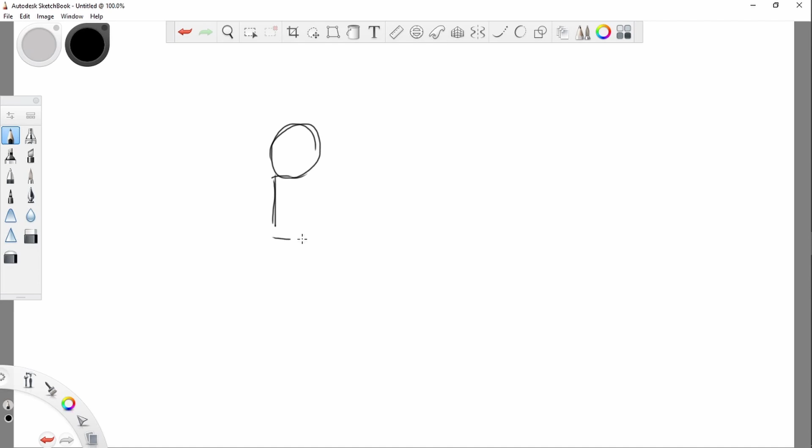He is going to have a square body and arms. I'll put one of his arms up, so he's waving. Let's give him some legs and some feet. We'll put one of his feet out to the side too, so he's in a nice pose instead of just standing straight up.

And we'll put some holes in his face. That way, he's got some eyes.

All right. So, if we're going to make this in Tinkercad, how are we going to do it? You can already see that I've made him out of cylinders and boxes, but if we want him to be able to stand up, he's going to need some surface area on the bottom of his feet.

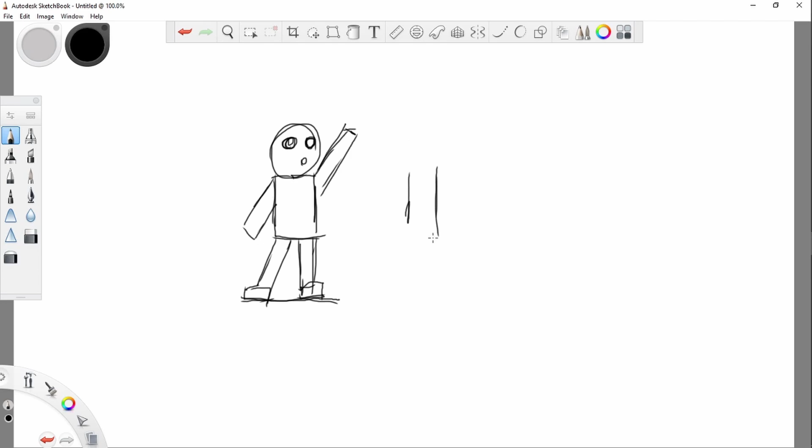So, from the side, we would see his body and his leg sticking out here, and his leg sticking down. We need to have boxes sticking out in front. See if that makes some sense here. This way, his feet give him enough area to make him stand up.

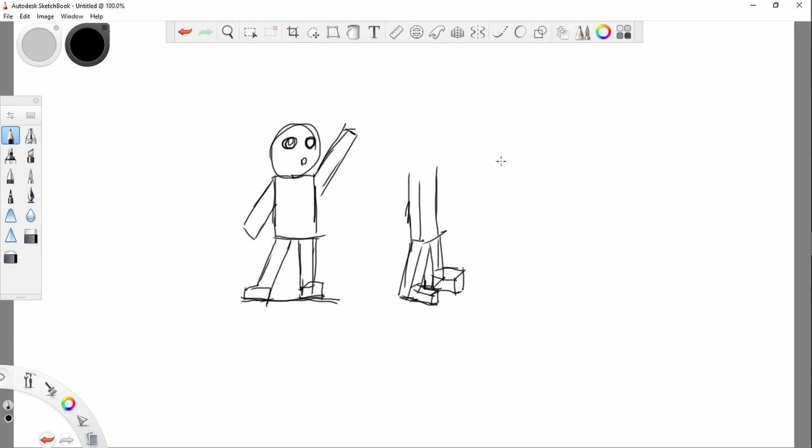We're going to want to design this so that it's easy to print, rather than having to support up his whole arm sticking up in the air like that. We're going to print him lying down on his back.

We are going to design our little stand-up stick figure guy, and we are going to design him lying down flat so that it's going to be much easier to make.

You'll see that when you move things around, they move on the floor on the work plane, and in order to make them up here, like where his face is, we would have to use our little up arrow here and move them up and down. That is going to be very difficult.

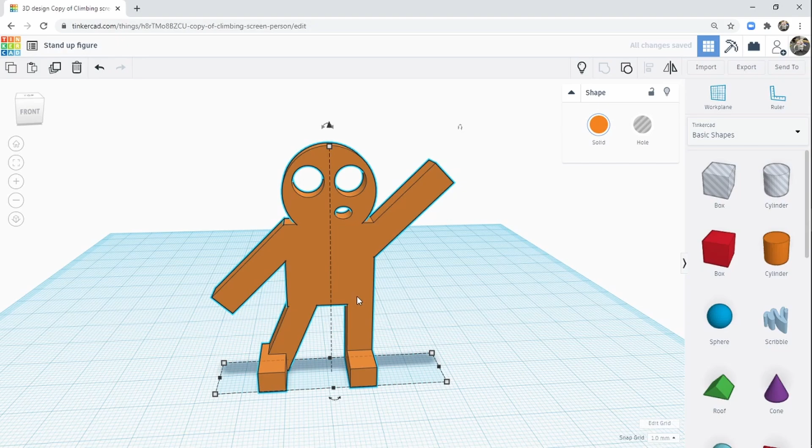So let's move our example off to the side. Let's look down at the work plane, and let's design our little guy.

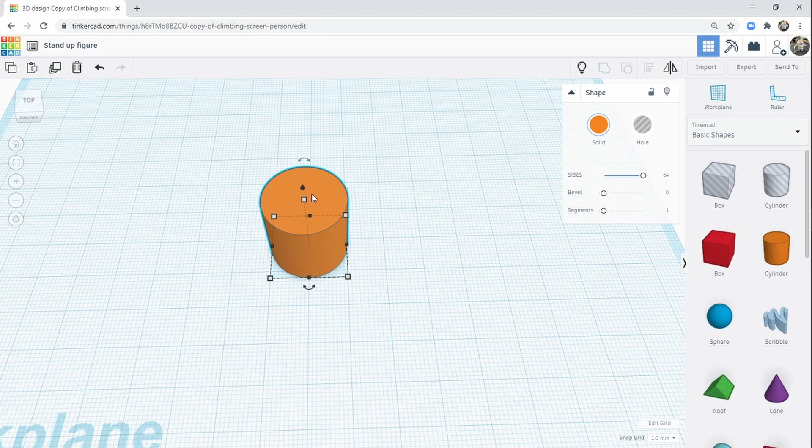So I am going to grab a cylinder, and just because I like it to be smoother, I'm going to turn up the number of sides all the way up. And we want this guy to be a little bit thin, so I'm going to make this 5 millimeters because it's a good size for a flat shape that's still sturdy enough that it doesn't bend.

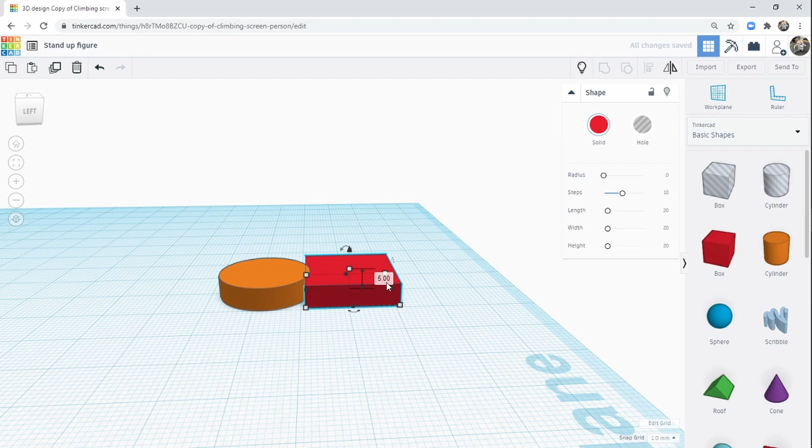All right, now I can look at this from the top, and we'll need a box for his body. We want it to overlap with his head a little bit, but we also want it to be the same thickness. So we're going to make it 5 exactly, so that he's going to have a flat surface on his front. And I'll move it over.

I can move it 1 millimeter at a time with my arrow keys, just to line it up where I want it. Now he's got some shoulders, and I'm going to want his arms and legs to be exactly the same height as this box.

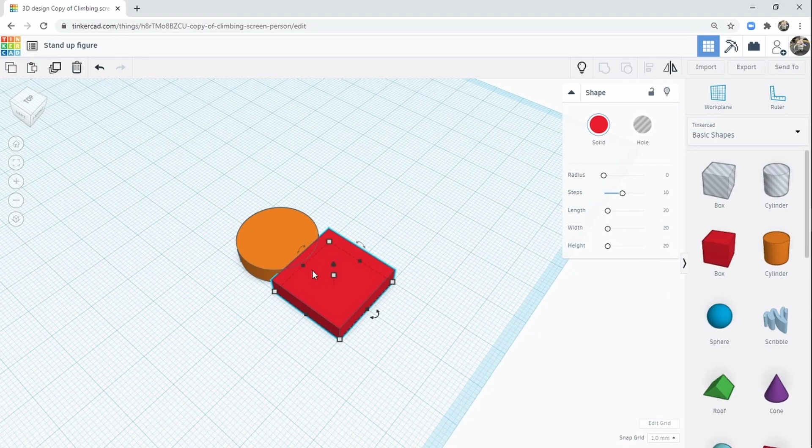So instead of doing that work again, I'm just going to make a copy of this one. I can use the copy and paste button to paste another one next to it. And then we can take this shape and decide that the arm is going to be a lot thinner. So we'll shrink that arm down. 6 seems good.

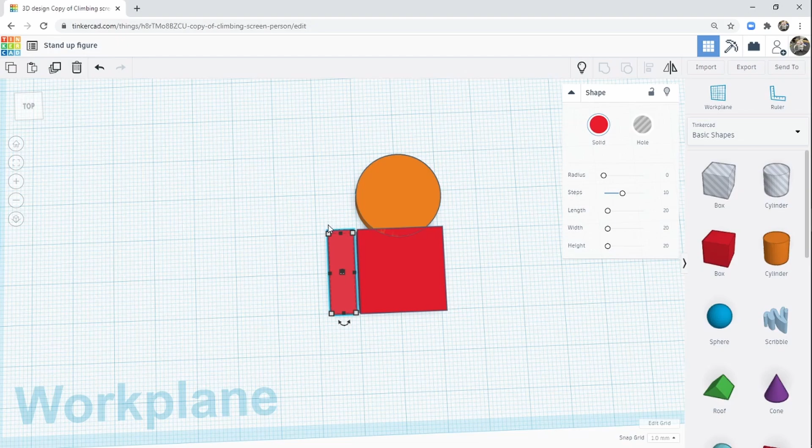There we go. Now if we keep our mouse outside the circle, we can rotate to any angle that we want. If we keep it inside the circle, we'll snap to these angles. So I can say I want his arms out exactly 45 degrees, and that seems good. Now I'm going to move it so that it lines up with his shoulder.

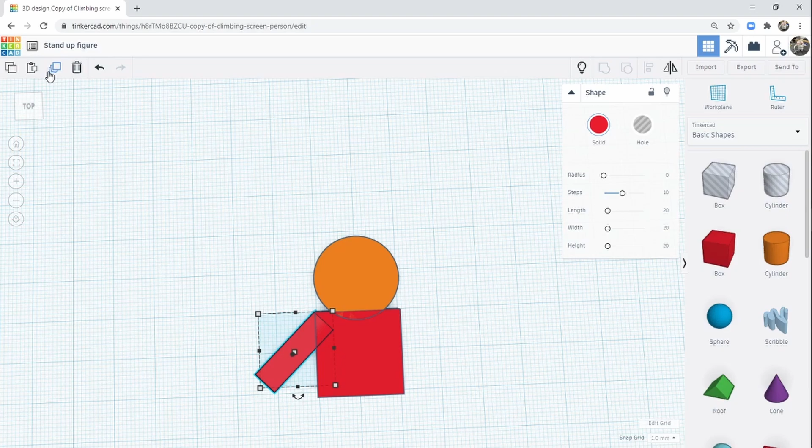And that looks nice. So now I want another arm, 45 degrees on the other side. So I am going to copy this one and paste it. With my second arm, I liked my design where he's pointing his arm up in the air. Maybe he's doing a dance move. So I'm just going to stick it on the other way.

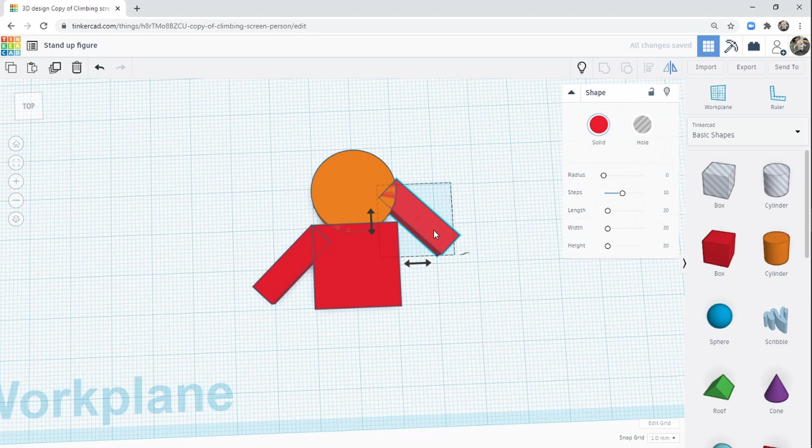Now if you wanted both of his arms down, you could rotate this, but you could also go up here to the mirror tool and just click on one of these arrows to flip it in the other direction. That way you could have an opposite shaped arm on the other side so that he's got both arms pointing down. I'm going to undo that because I like his arm pointing up.

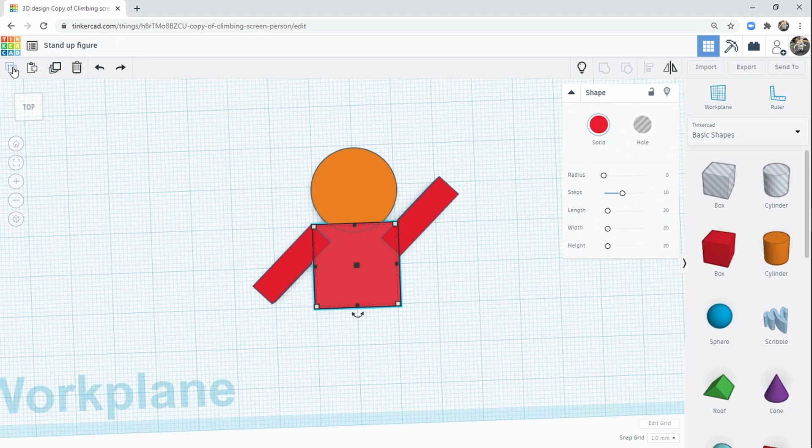Next we need some legs. So let's go ahead and make a copy of the body again. Since I already rotated these arms, I don't want to worry about rotating them back. Instead, I'll just copy and paste the body, and we'll move it down underneath and shrink it so it lines up. There we go. Now we've got one leg.

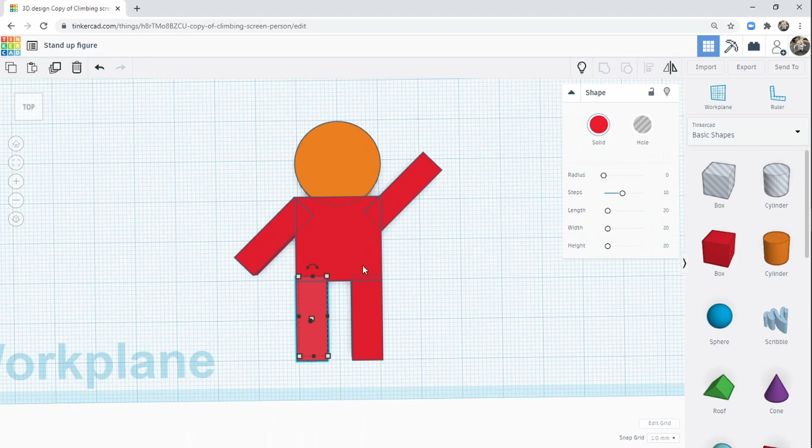I will copy it and paste it again, and we can move over and have a second leg. I like sticking one of his legs out a little bit to give him even more of a pose. So I am going to rotate, but this time instead of going exactly 45 degrees like the arm, I'll just rotate it out a little tiny bit, to wherever I like it.

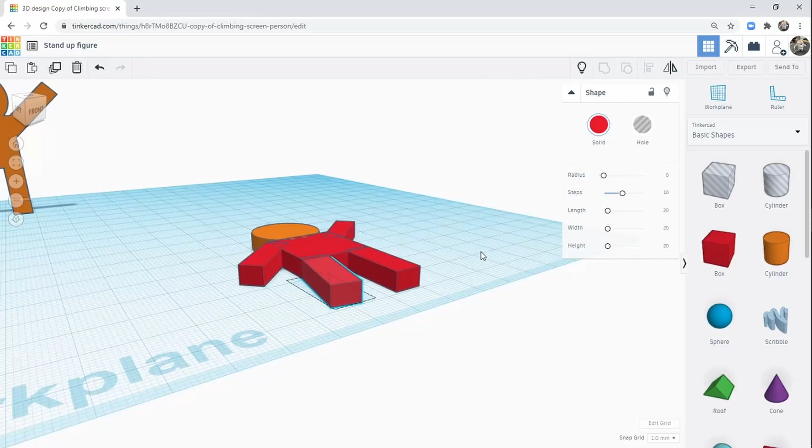And let's move it to the side so it's sticking off the side of his body there. Now we can see that if we stood him up, he has a very small area on the bottom of his feet. Because we've made him 5 millimeters, this is half a centimeter, so he would be really easy to tip over. So let's put some feet on him.

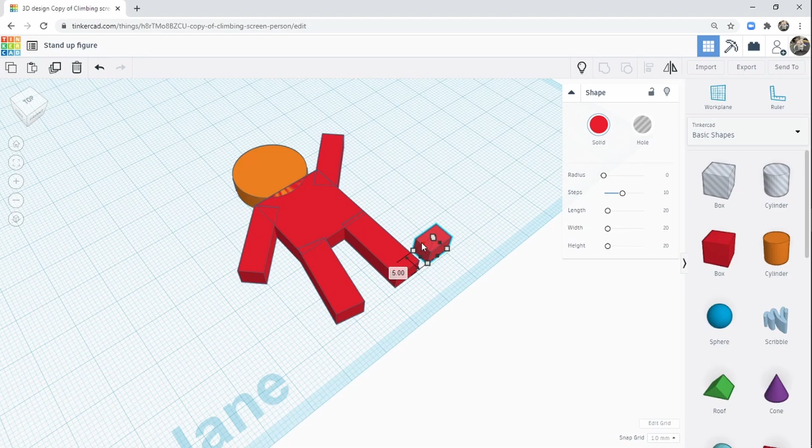And since I just copied this, I'm going to paste another copy of my leg in here. And with this box selected, I'm just going to shorten this down, so we'll have another 5 millimeter wide foot. And when I look at it from the side, I can use my top handle here to stretch this out. And there we go. We'll make it a 12 millimeter foot sticking off of this guy.

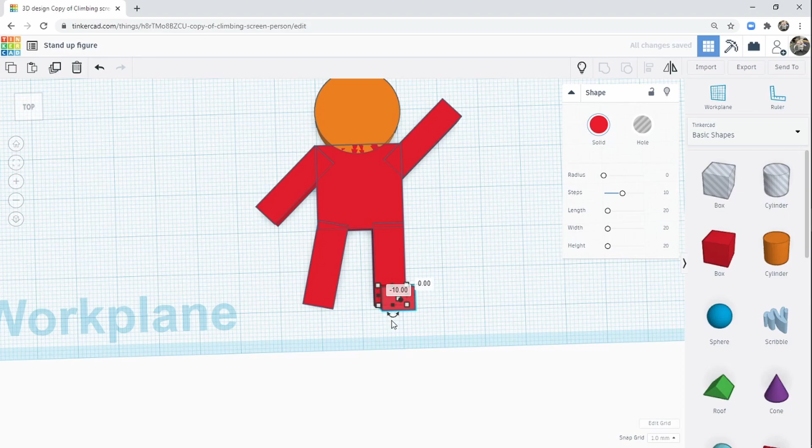Now we can just line it up with his leg here. And since we're snapping to 1 millimeter at a time, it's easy to use the arrow keys to make sure that all of the corners line up and we have a perfectly flat surface at the bottom.

Now, let's copy and paste another one of these feet, and we'll use the arrow keys to move it straight over to the side. There we go. This way, I know that the feet are lined up at exactly the same height, and that means that he will not tip over when I stand him up.

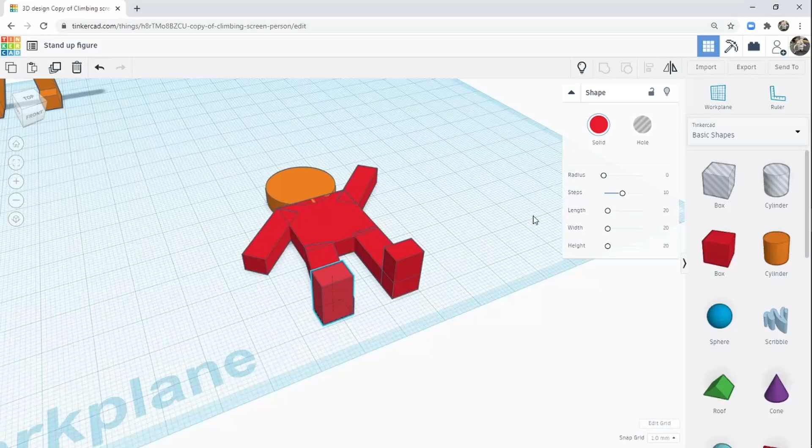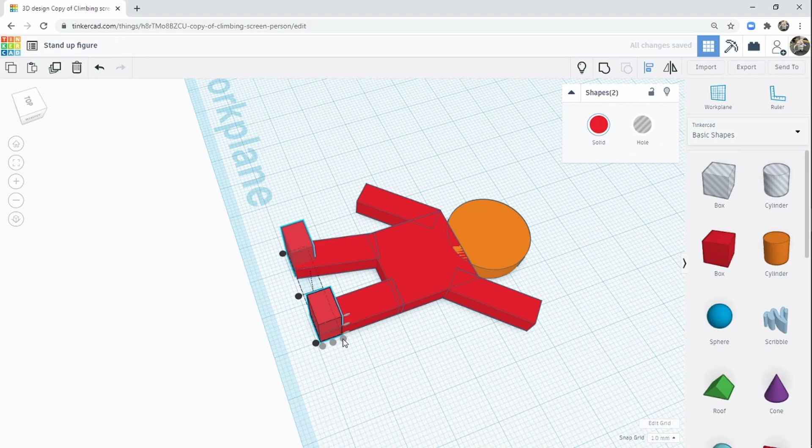Now, if you accidentally move the feet to a different place, you can hold down Shift, select the other foot, and then we can click on the Align tool. The Align tool will change our handles into these circles, and we can see that if I click on this side, I can line the 2 feet up in the middle with the bottom edge or with the top edge. So I'll just line them up with the top edge so my lower foot moves up to where my upper foot is. And now both of them are perfectly lined up, so they'll be flat on the ground again.

Let's click on this foot and just nudge it over so it matches better with the leg. Great. Now, if we want, we can add details like a face to him with some holes.

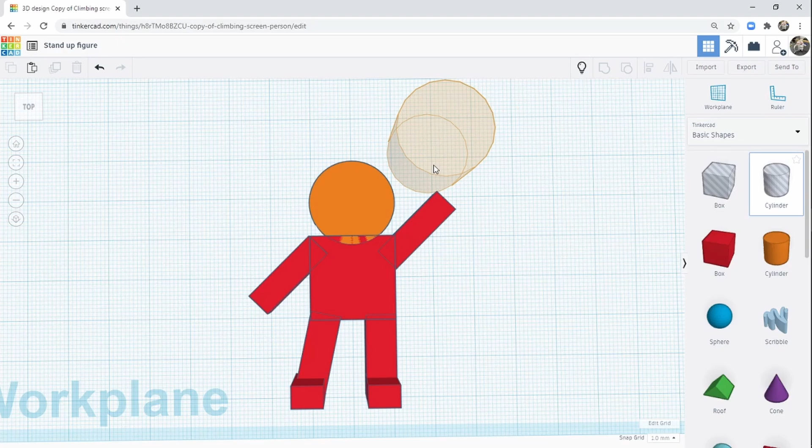So I'm going to quickly just grab a hole, and anything can be a hole. If I had a solid cylinder, I could click on hole to change it into a hole. Let's make it smooth, and let's shrink this down so that we have a shape that can be an eye.

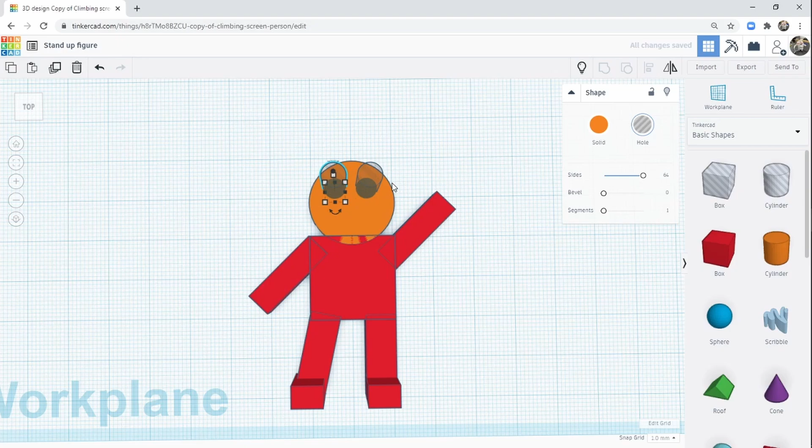Copy and paste, and we'll move our second eye over to the side, and paste one more for our third shape. Let's zoom in a little bit. Maybe make his mouth bigger than his eyes this time. Perhaps he is singing.

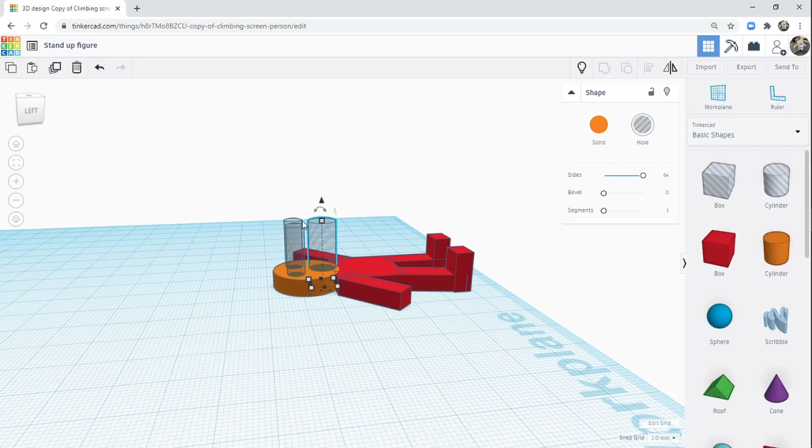So we're going to select everything and click on Group. Once we group things together, all of the solid shapes are going to be added together and all of the holes are going to be cut out.

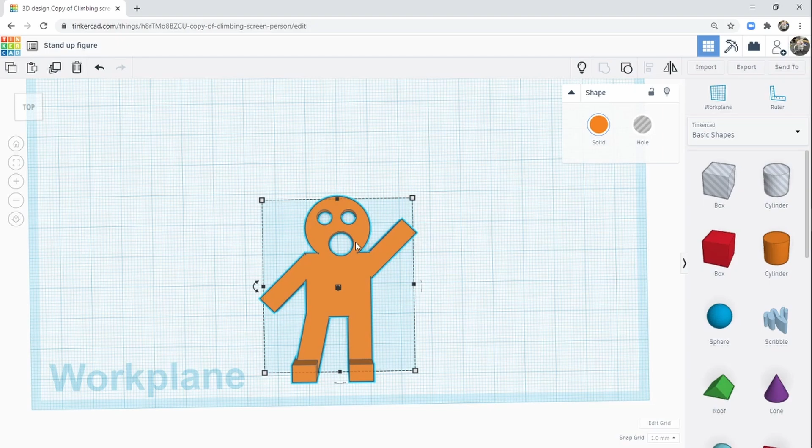Now we have our little guy with his face, and if we want, we use that rotate tool to stand him up, and D to drop him on the floor.

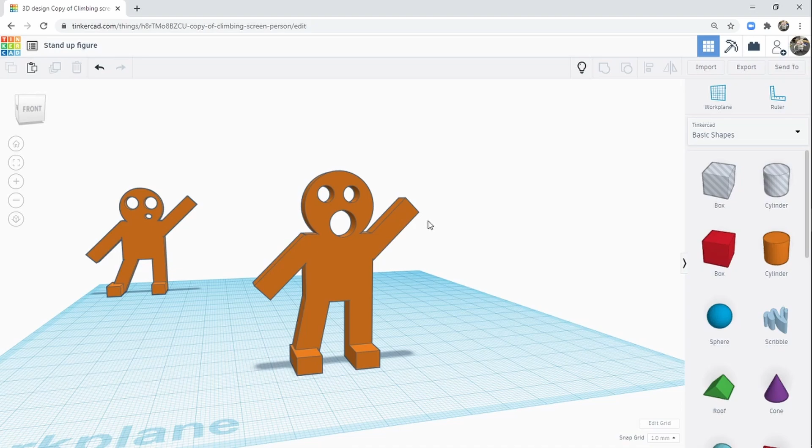Looking good. We are going to set our little stand-up figure up to print. As I mentioned in the idea video, we don't want to print him standing up, where we'll need to support his arms, and it'll be very tall, take a long time, and use some extra material.

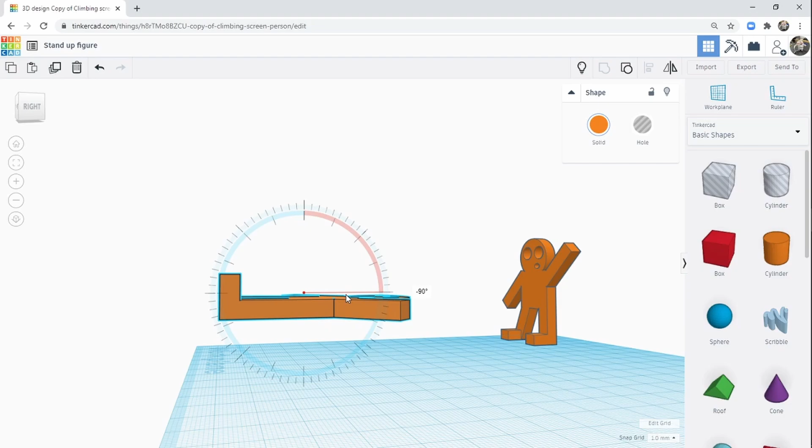So let's select him and make sure that he's lying down on the biggest flat surface he has, his back. I'm going to use the rotate tool and keep my mouse inside the circle to put it at 90 degrees. Now I can hit D to drop it on the floor.

So you can see he's not floating in the air there. And he's looking good. He's completely flat on the ground.

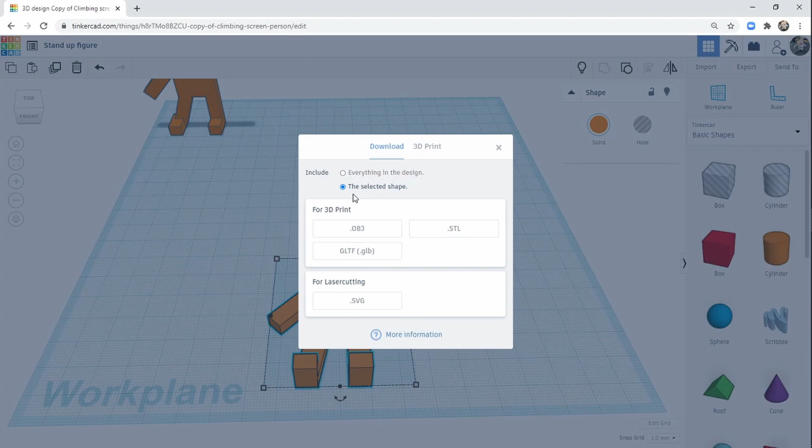So now that I have this guy selected, I am going to click on Export. We're going to export only the selected shape - we don't want our other example in there. So let's click STL, which is the most common 3D printing file. And now I've got my STL file downloaded.

I'm going to go over to my slicer. So Cura is set up for the Creality CR10 and generic PLA. PLA is one of the easiest plastics to use, and that's why we use it all the time.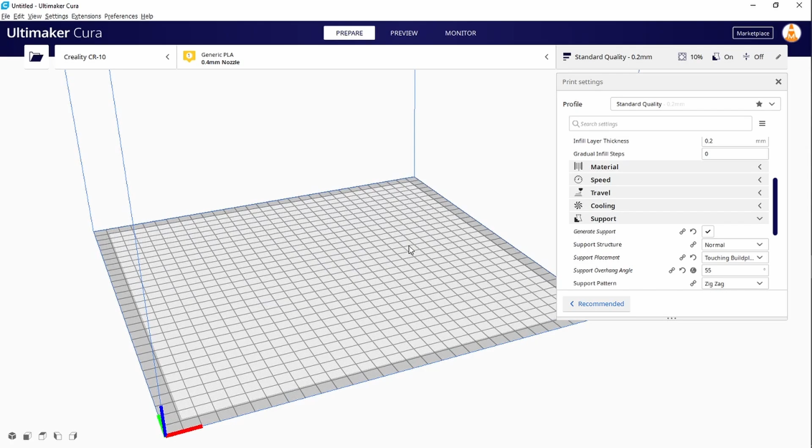So let's click on the folder here and open up our STL file that we just downloaded. And we should see it pop into the middle of our building area.

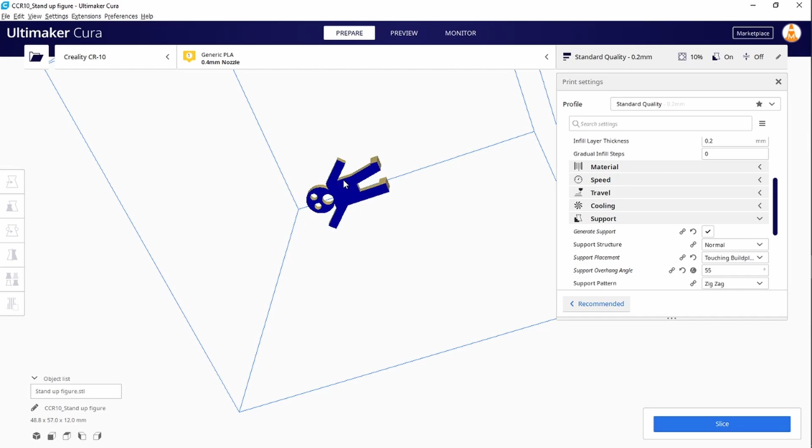So this grid is just like in Tinkercad, but it represents the actual floor of our printer. And if we look at this from the bottom, we can see the back side of him is blue, which is great. That means all of these surfaces are touching the floor, which is going to make him very easy to print. And since he's a nice solid shape without any curves or domes on him, and he's going to print straight up, including his feet...

...we can turn the quality setting down lower. So if we go to low quality, what the quality setting really means is the height of the layers. And it's going to move up higher each time that it finishes a layer. That means we're going to be able to print him faster with less layers.

And the sides of him might seem a little bit textured, but because we don't have nice smooth curves to worry about, everything is going to look perfectly good, even at lower quality.

Now let's double check our other settings. We don't really need support on, but since there's nothing marked in red, it won't generate any support anyways. So we'll click on Slice.

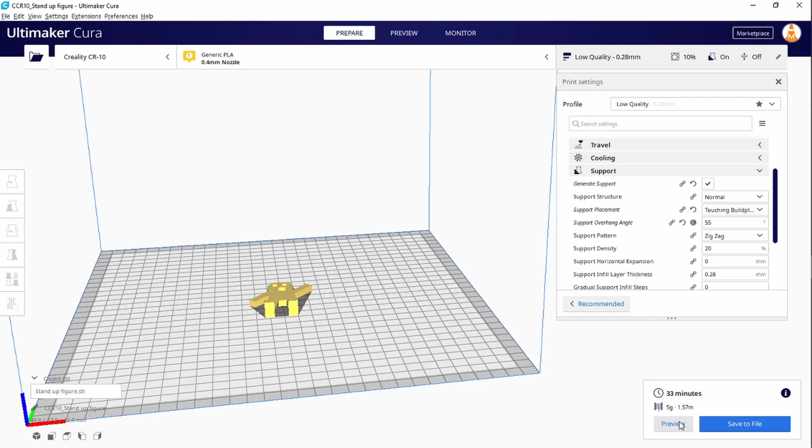We can see this guy's going to take half an hour, and click on Preview just to double check that we are only printing what we want to print. I don't see any unneeded supports.

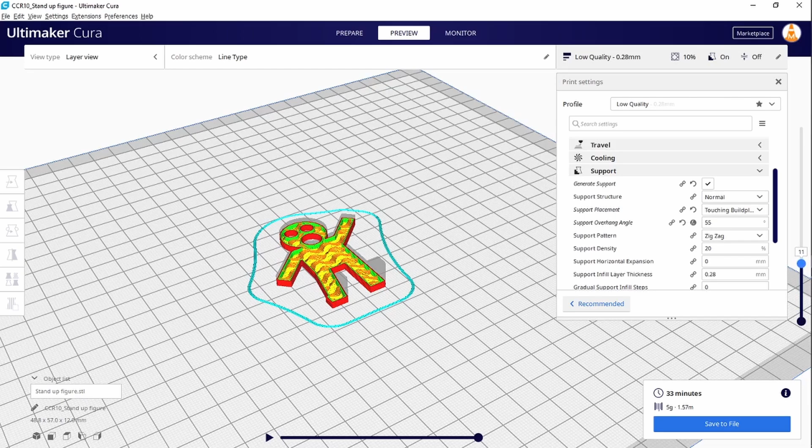And we can scroll down on our layers here, and we can see he's going to be printed with our wavy infill here. On the inside, he's not going to be solid. He's going to be filled in with these wavy lines.

Looking good. Now we just have to save to file, and we have our G-code instructions for the printer. We're ready to upload and print.